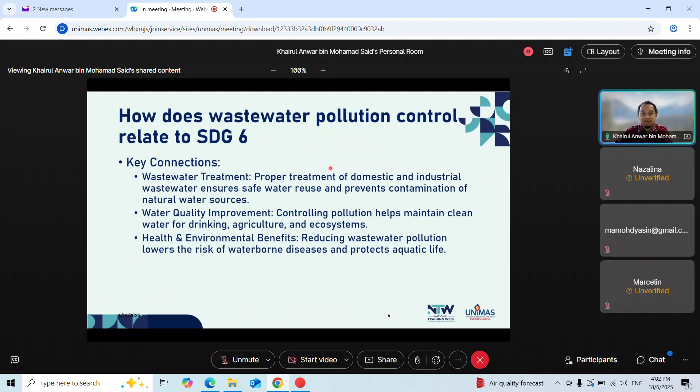SDG 6 focuses on ensuring clean water and sanitation for all. So how does wastewater pollution control relate to SDG 6? Proper treatment of domestic and industrial wastewater ensures safe water reuse, prevents contamination of natural water sources, improves water quality, and provides health and environmental benefits by reducing the risk of waterborne disease and protecting aquatic life. This is how water pollution control relates to SDG number 6.

So micro-credential, some of you might have heard the term though don't necessarily understand what it is. Micro-credential is a short competency-based recognition that demonstrates proficiency in a specific skill or subject area. This definition is from Times Magazine.

They are often earned through a series of courses and culminate in a digital badge from accredited institutions such as UNIMAS, signaling to employers that you possess focused knowledge.

Another thing is that by doing micro-credential, there are possibilities because we have APEL M now. We have APEL A, APEL C. So what is APEL?

For example, APEL A is using experience in order to enter a higher degree. APEL C is for credit transfer based on experience, and another one is APEL M. This one is the micro-credential, meaning if you possess a digital badge from an accredited institution, you can apply for credit transfer or exemption when you enroll in a higher degree.

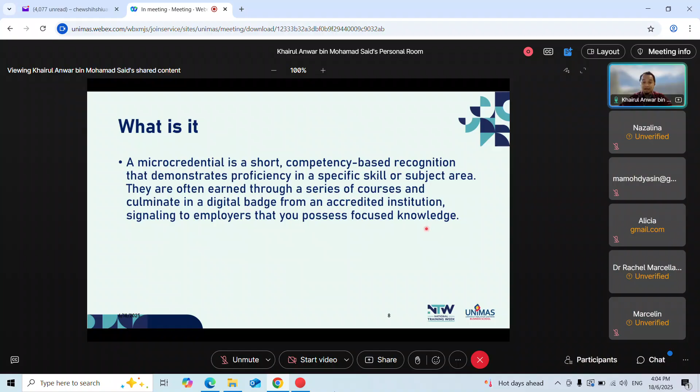For UNIMAS, this is how the badge looks like. Learners who successfully complete the micro-credential courses receive digital badges from UNIMAS. These badges can be shared on professional platforms such as LinkedIn, resume, and portfolio to highlight your skill.

The major goal of primary treatment is to remove from wastewater those pollutants that will either settle or float. The major goal of secondary treatment is to remove the soluble BOD5 that escapes the primary process. Tertiary treatment processes more - the process may involve chemical treatment and filtration of the wastewater. So the higher the treatment level, tertiary treatment, the more expensive, but the cleaner the water.

This is the degree of treatment: bar rack, grit chamber, equalization - basically this is the pre-treatment, then go for primary settling which starts the primary treatment, then secondary treatment, and tertiary treatment.

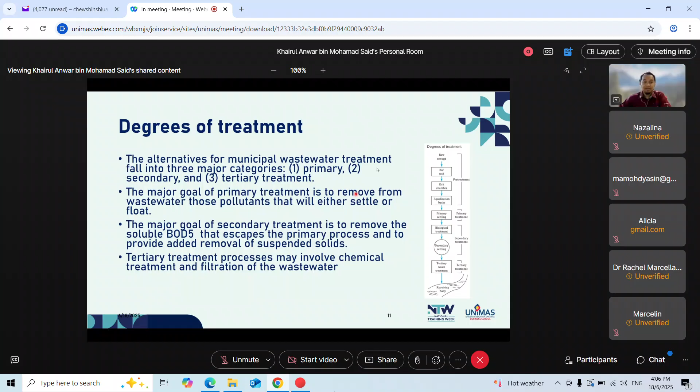I will not go into detail on each of the treatments because there are so many. Even the pre-treatment has at least three stages - bar rack, grit chamber, and equalization basin - before the primary treatment starts. Now, in this short period, I will just show you how the bar rack design is done using a solver program in Excel.

What is a bar rack? The bar rack looks like this - it's a screen. The first device encountered at the wastewater treatment plant is a bar rack. Any treatment, even water treatment (not just wastewater), has a bar rack to remove large objects that would damage the pump and valve after it, normally when it enters the primary treatment. The trash rack has large openings, 40 to 150 millimeters, designed to prevent large objects such as logs from entering the plant. We can say this is a mechanical separation.

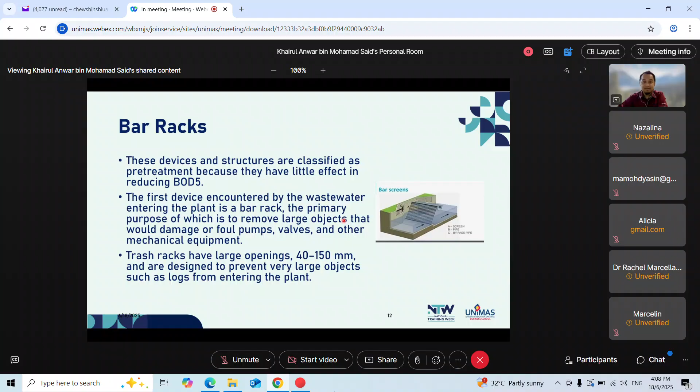The nomenclature of racks and screens: we have trash rack, bar rack, screen, fine screen, very fine screen, micro screen. Each of these types has a different opening size. The smaller it is, the better it can separate, but it will get damaged or clogged if you suddenly choose to use a micro screen at the first treatment stage. It depends on the raw water that enters the treatment system.

For trash rack, for example, the opening is 40 to 150 mm, typically used to prevent logs, stumps, and heavy debris. For bar rack, only 6 to 75 millimeters - this is to remove rag debris and large solids, which is normally used in wastewater treatment plants.

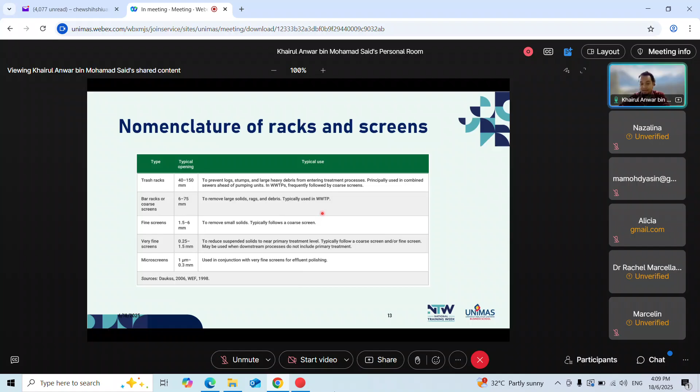So this is based on Metcalf and Eddy. So anyone who does design, this book is, I would say, a well-referenced book. Metcalf and Eddy is very detailed, although it's already years since it was published. Still, we refer to this book just to get the idea how to do the design.

This falls into four categories: chain-driven, reciprocating rake, catenary, and continuous belt design.

It can be operated using a sensor, or either you can use the hydraulic brake or the timer.

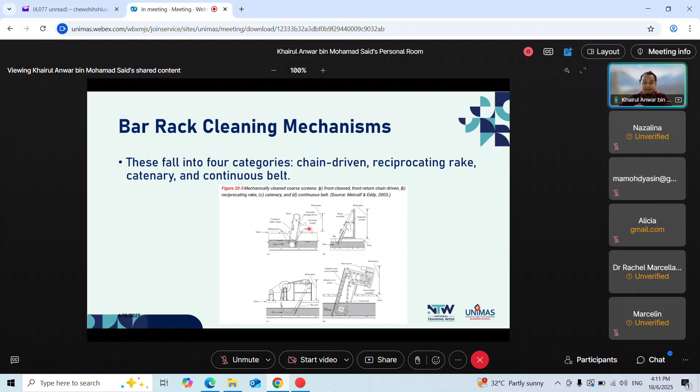Advantages and disadvantages of various types of screens. So for the chain-driven screen, for the front clean back return - in this picture it's a front clean front return - this is under chain-driven screen, the first one.

So for front clean back return, its cleaning element has a short clean cycle. Disadvantage is the unit has submerged moving parts that it requires channel dewatering for maintenance. Yes, for heavy-duty applications, disadvantage is less efficient screenings removal - carryover or residual screening to screened wastewater channel.

There are some other methods here - not methods, rather how it's operated.

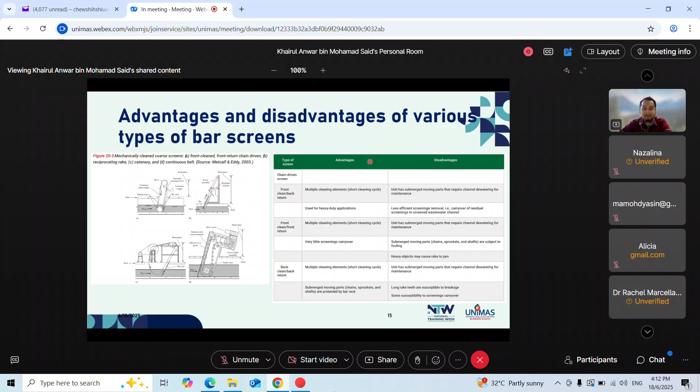So for the bar rack design practice: capacity and redundancy - two or more mechanically cleaned screens are provided so that one unit may be taken out of service without impairing performance. So the best design practice is to have two bar rack designs installed.

The location is mainly - the screen should be installed ahead of the grit chamber. That is a rule of thumb, or common sense - you remove the big physical items before you do the grit chamber.

Then the velocity should be at least 0.4 meter per second to minimize the deposition of solids in the channel. The velocity through the screen should be less than 0.9 meters at peak flow to minimize passing through the screen.

Because the screen is a rack, it's a line - horizontal or vertical line.

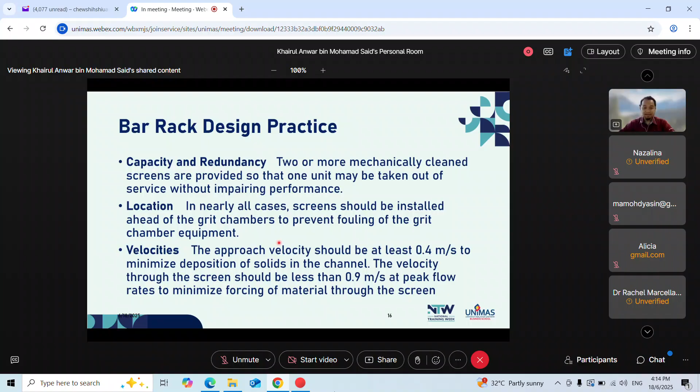So for the channel, dual channel must be provided. Typically they are constructed of concrete. This is how the two channels with bar rack look. They must be capable of being isolated by the use of slide gates or recesses - the channel wall for the insertion of stop logs.

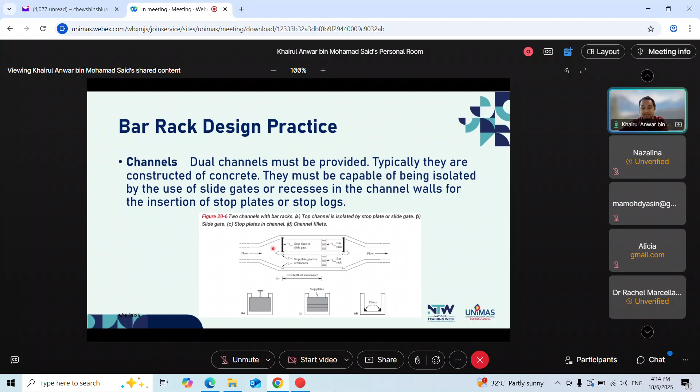The velocity of the open channel flow in the channel is described by many equations. We have two equations, V and Q. So V equals 1 over N, R to the power of 2/3, S to the power of 1/2. V is velocity, N is the coefficient of roughness, R is the hydraulic radius - in this case the cross-sectional area of flow over the wetted perimeter. S is the slope of the gradient line, and A is the cross-sectional area of the flow.

So how can we use this equation to do the design of the bar rack? Design the channel for the bar rack for Waterloo - Waterloo is an example in the book.

Approach velocity at average flow rate is 0.4 meter per second. Approach velocity at peak hour design capacity is less than 0.9 meter per second. Slope of channel is 0.0001 meter per meter. Width of channel is equal to the parshall flume inlet.

So the parshall flume inlet refers to the way this channel is designed. By using a parshall flume, you can actually determine the flow rate based on the height of the water outlet. You can read more about what the parshall flume is. So using a parshall flume means it doesn't have to install a flow meter - you can relate it by the height of the water.

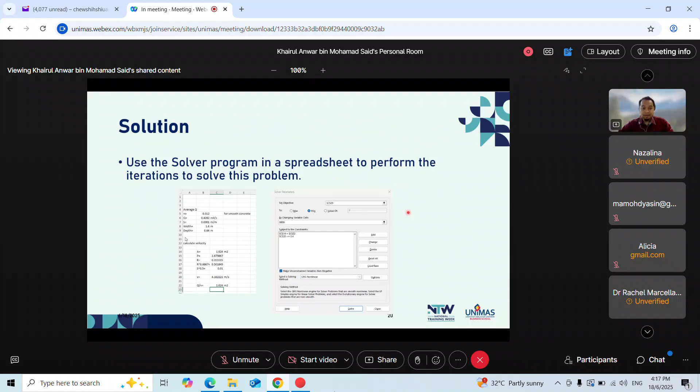So in this session today, I show you the solver program in the spreadsheet, which will assist the user to iterate and solve this problem. So this is the spreadsheet.

It's a simple spreadsheet, but using a solver program. In order to use a solver program here, this is the solver program. It's not a regular thing - you will not see solver in a normal or default Excel.

You need to enable it in options. Go to the add-ins, find solver, it's the last one here. Normally for my case, I already have it added in. So if you want to use it, you need to add it into the active application add-in. Select Excel add-in, click this, add-in available, click solver add-in, okay.

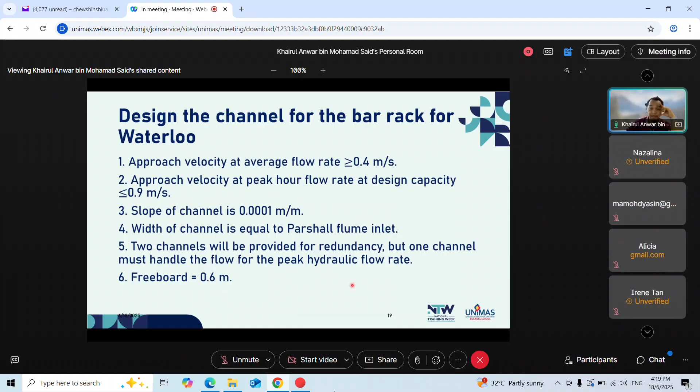So the solver will appear under the data tab at the end. So for this value, average Q, N is this is a Manning equation, the coefficient of roughness. The coefficient of roughness in this case is 0.012. Q is 0.4282. S is the slope, width, and depth of the channel. Then calculate the velocity.

Okay, we go one by one. Begin with the average design flow rate and set the fixed parameters as follows. So B5 is here, so N equals 0.012. B6, this is from the previous example, the Q is 0.4282. So B7 is here, 0.0001 is the slope, meter over meter. So the unit is correct, meter over meter, because that's how they calculate it, yeah, it's a slope.

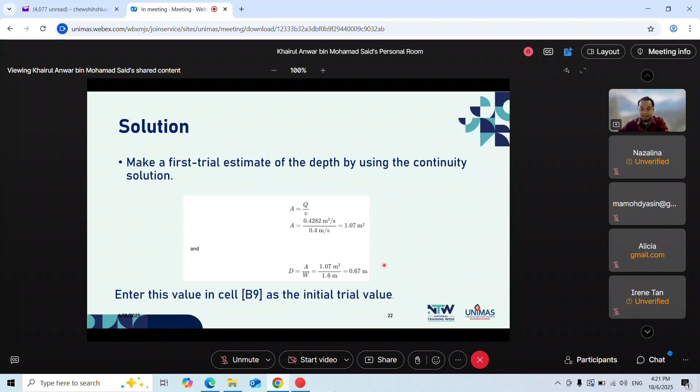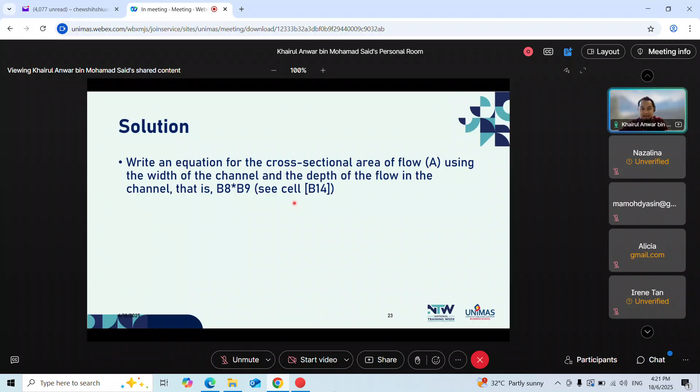For the depth D, because this is trial and error, write an equation for the cross-sectional area of flow using the width of the channel and the depth of flow in the channel, that is B8 times B9, so cell B14. So B14 is B9 multiplied by B8, which is true - width times depth, we get A.

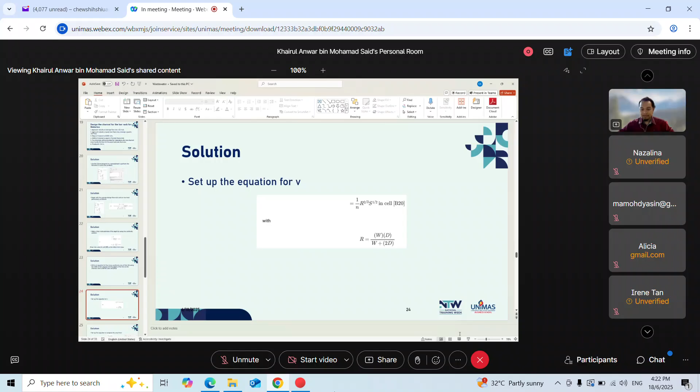So you need to write the formula, in this case 1 over B5 - remember it's 1 over N, so N is B5 cell. Then R is C16. Then S is - where is S? S is C18, yeah C18.

Okay, with R equal to W times D over W plus 2 times D. So in this case, R is this equation.

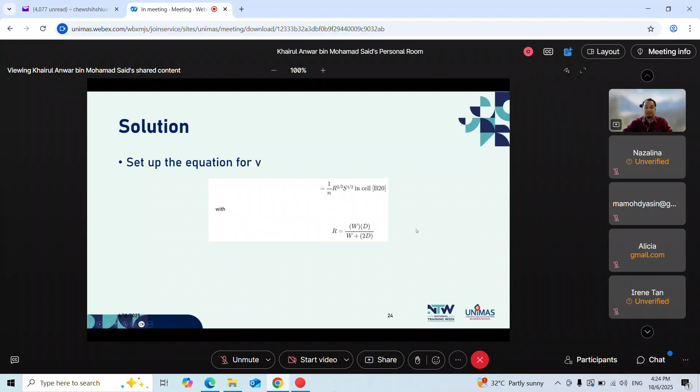The one set up the equation to compute the area from Q over v in cell B22.

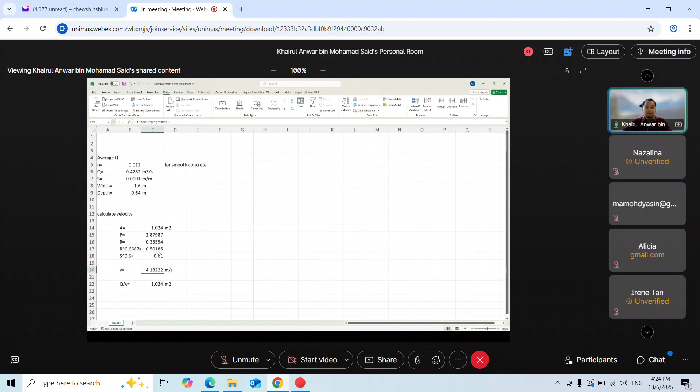Activate the dialog box for solver and designate the target cell B20, the one containing the computation of the velocity set equal to min. Once that's ready, click solver. So the target is B20, based on the main information. By changing variable cell, the cell that will be the manipulated variable is B9, the depth. The subject to constraint is when you select it.

So for the subject to constraint, you click add. It will ask you to select for the constraint. In this case, C14 must be equal to C22. And C20 here must be more than or equal to 0.4, so 0.4 is the minimum with the second here, equal to min.

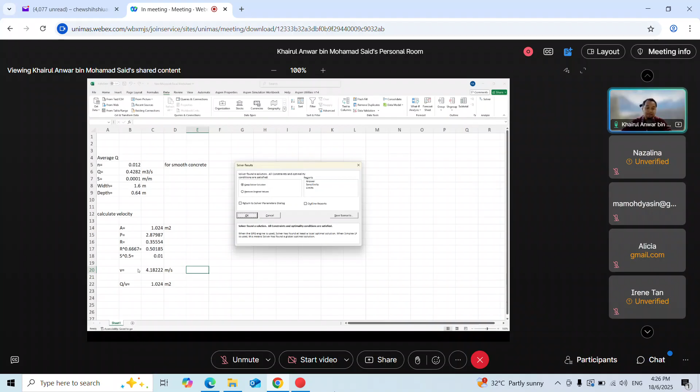So if everything is ready, you just click solve. Solver found a solution, constraints and optimality conditions are satisfied. So before you start, the value for V is not there - once we do the solver, it will appear. So this is the optimum, optimum design.

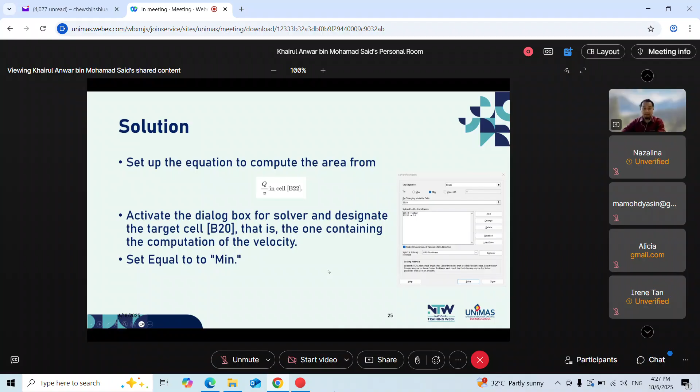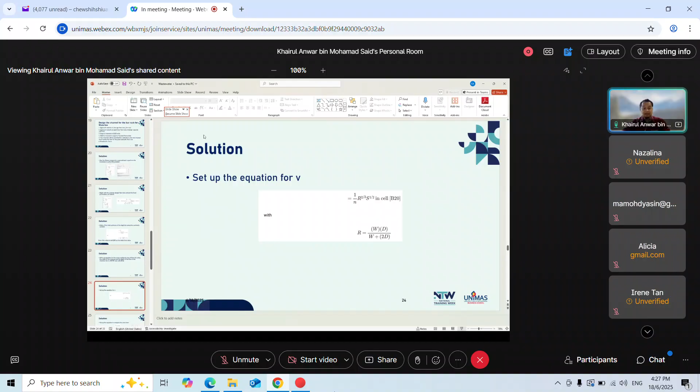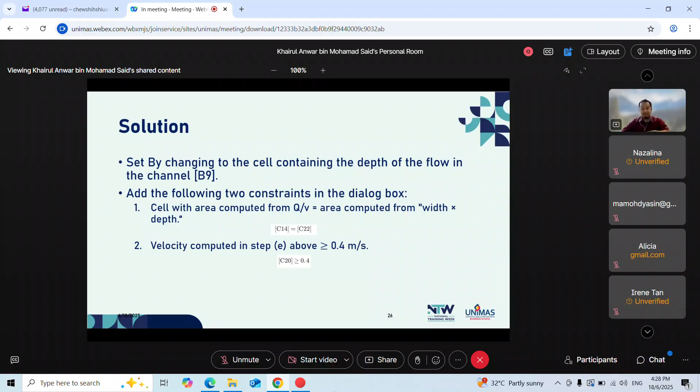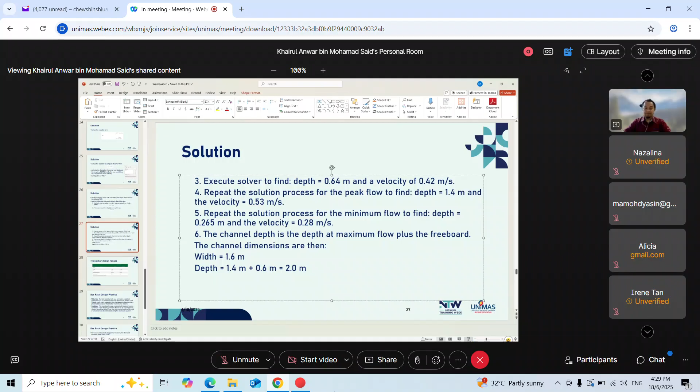The channel depth is the depth at maximum flow plus the freeboard. The channel dimensions are then 1.6 meter expansion plus... the channel dimension is width 1.6 meter, depth plus freeboard 2 meter.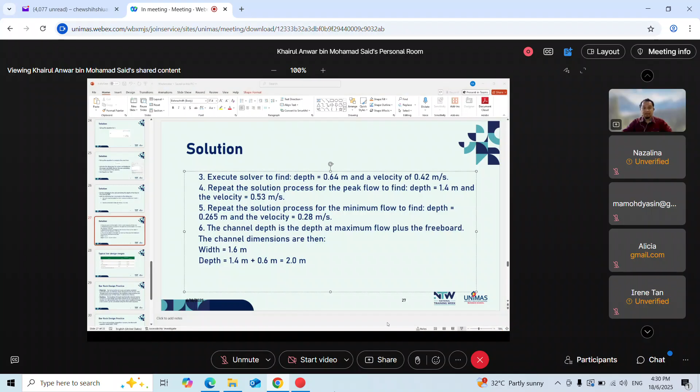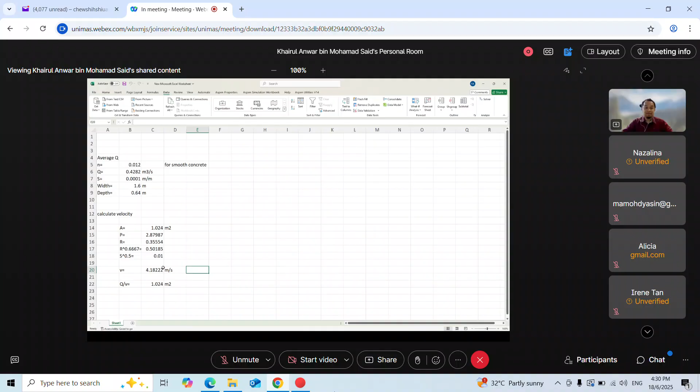It's very interesting, you change something here and it will calculate the velocity. It's easier to do the design, just put in the value and you can see how much it affects the main equation. For the n here, this is based on a booklet which gives an index for the smooth concrete.

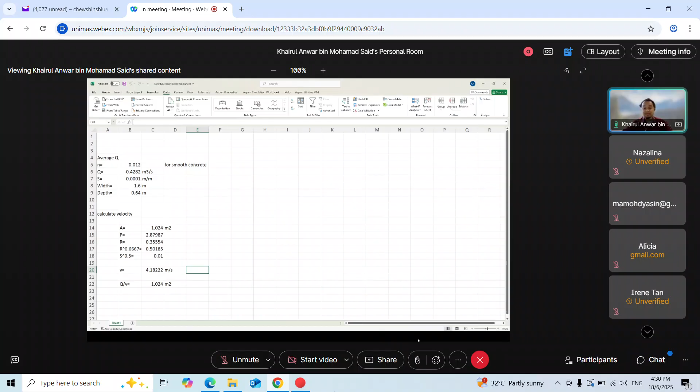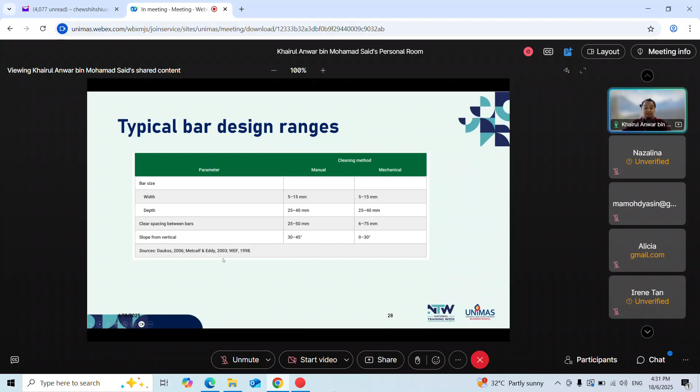It's still based on, we can find this information from the Metcalf and Eddy. It's there.

So for the bar rack design practice, for material, the practice is to use corrosion resistant materials, such as stainless steel and plastic for the bar rack. Though much more expensive, the stainless steel system is preferred because of their better maintenance history, but it depends on your feed.

So normally for plastic, we use it in the lab for the lab session so students can simulate it. For stainless steel, we use it if the feed is corrosive and at high temperature. There are also fiberglass and concrete to design or build the bar rack.

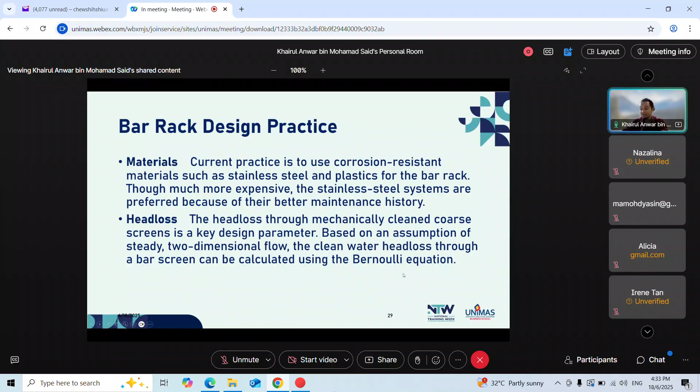The head loss through a mechanically clean bar screen is a key design parameter. Based on an assumption of steady two-dimensional flow, the clean water head loss through the bar screen can be derived using the Bernoulli equation. So for clean and partially clogged bar screens, the Bernoulli equation gives an equation such as this.

So HL is head loss, K is the empirical discharge coefficient, V through is the velocity through the bar screen, V approach is the approach velocity, and G is the gravitational acceleration.

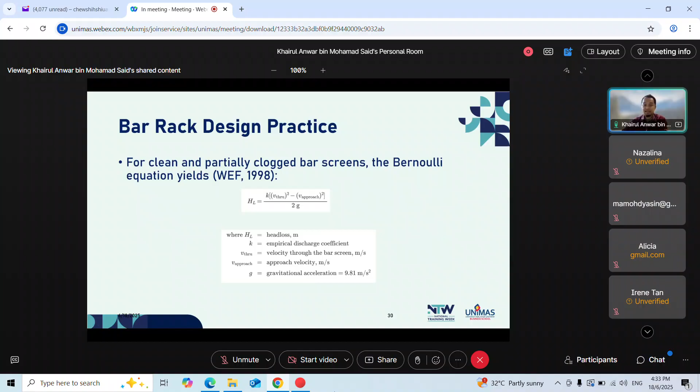The discharge coefficient is taken to be 1.43 for a clean screen and 1.67 for a partially clogged screen. The approach velocity is calculated for the channel upstream of the bar rack, and the velocity into the bar rack is based on the effective area of the screen openings.

It is estimated as the sum of the vertical projections of the screen openings. The approximate number of bars is the width of the channel minus bar spacing, divided by bar width plus bar spacing, giving the number of bars. The number of bar spaces is the number of bars plus 1.

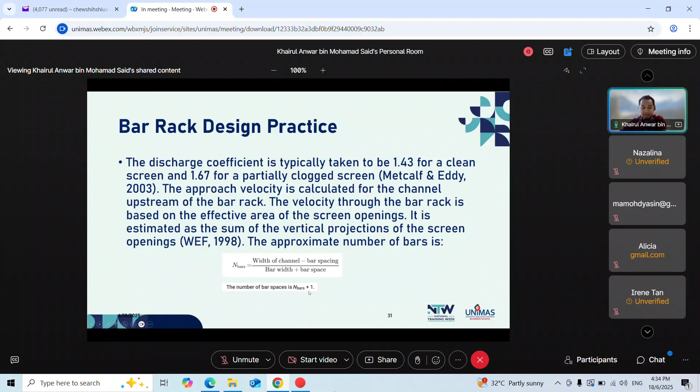Head loss through a mechanically cleaned bar rack is typically limited to 150 mm by operational control. The control activates the raking mechanism based on measurement of the differential head upstream and downstream of the screen. Alternatively, the raking mechanism may be operated by a time clock. So either a hydraulic head differential or a time clock is used to operate the bar rack.

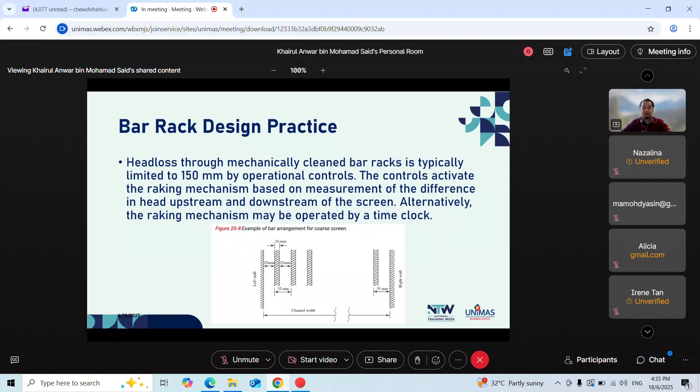Still got time. So there's an example of the head loss: estimate the head loss for a bar rack for Waterloo with a clean bar rack.

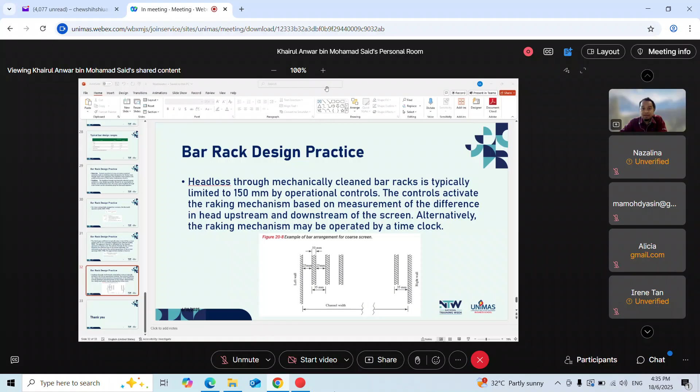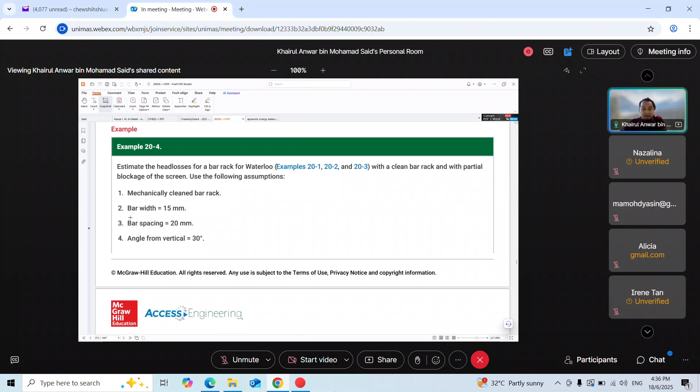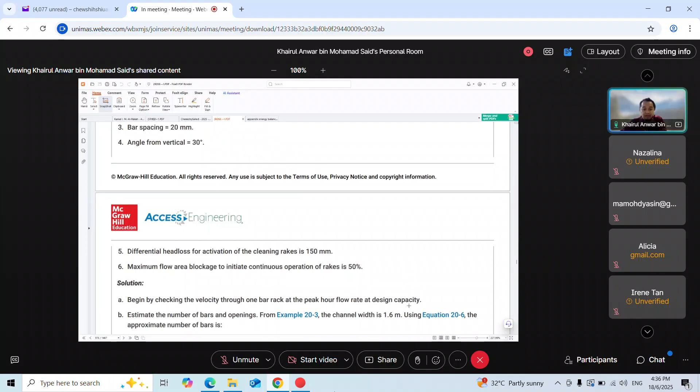Estimate the head loss for a bar rack for Waterloo with a clean bar rack and with a partially clogged screen. The assumption is a mechanically cleaned bar rack. Bar width is 15 mm, bar spacing 20 mm, angle from the vertical is 30 degrees. Differential head loss to initiate operation of the cleaning rakes is 150 mm, and the maximum flow area blockage to initiate continuous operation of the rakes is 50%.

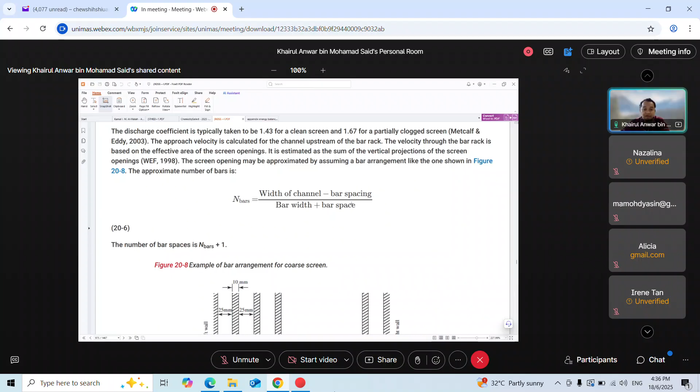By checking the velocity through a bar rack at peak hour flow rate at design capacity, estimate the number of bars and openings. To calculate the number of bars we use this equation, let's give it a name, using the equation: width of channel minus bar spacing, over bar width plus bar spacing.

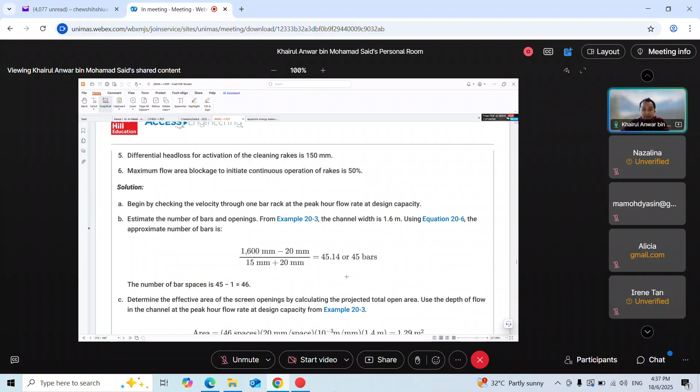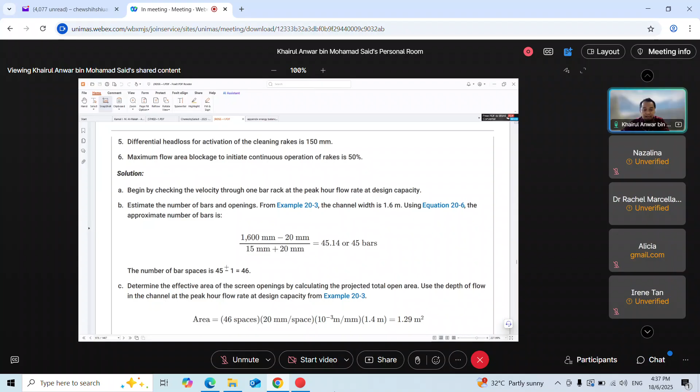In this case, 1600 millimeter minus 20 mm, over 15 mm plus 20 mm, so we get 45 bars. The number of spaces should be plus 1, so 45 plus 1 is 46.

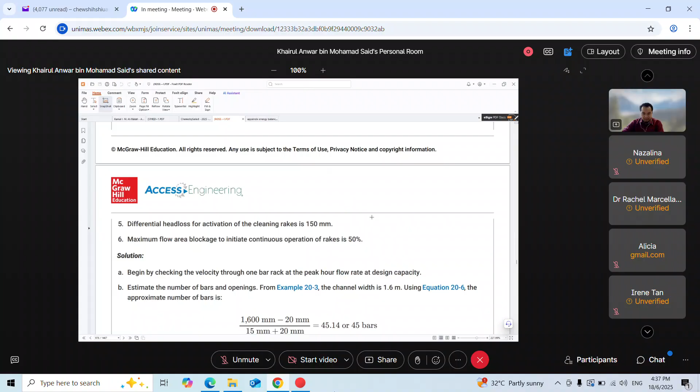Determine the effective area of the screen openings by calculating the total area. Use the depth of flow in the channel at the peak hour flow rate design capacity. Since we have 46 spaces with 20 mm per space, as given in the equation, with unit conversion, times 1.4, is the depth.

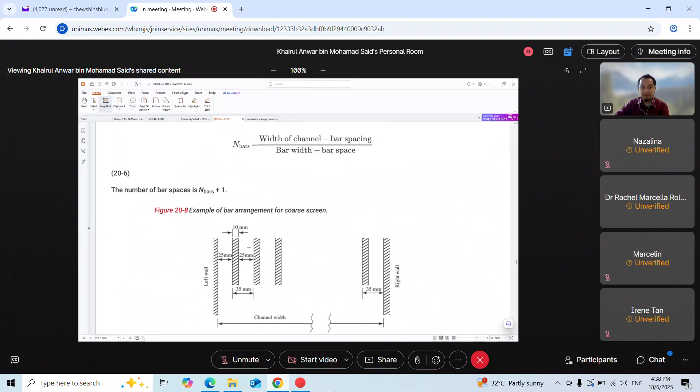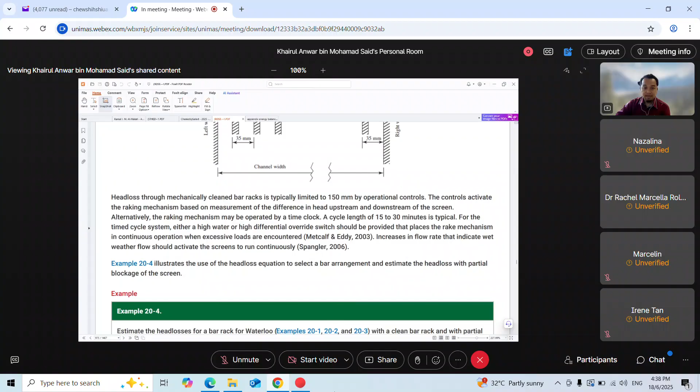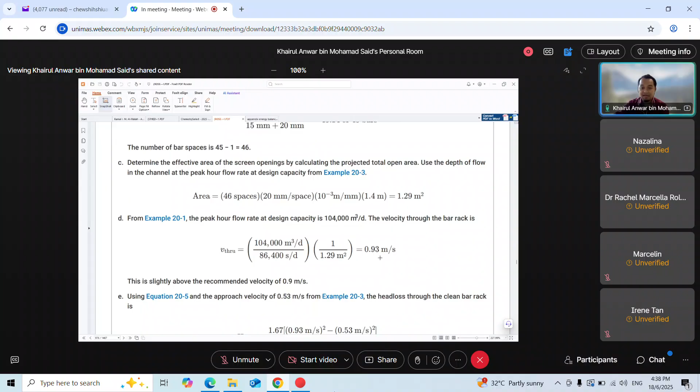So the V through is 0.93 meter per second, slightly above the recommended velocity. This is the velocity when water is crossing the rack, the bar. It should not be above 0.9 meter per second.

Using equation 20-5, approach velocity of 0.53 meter per second, head loss through the clean bar rack is using equation head loss HL, we get 50 millimeter head loss.

So if the bar rack is 50% clogged, the area of flow is reduced by 50%, and velocity through the bar rack is doubled to 1.86 meter per second. So the head loss is then 230 millimeter if the bar rack is clogged.

And if this head loss is greater than that set for initial cleaning, the velocity constraint is exceeded. Now check the velocity and head loss at the average flow rate at design capacity of 37,000 meter cube per day. The depth is 0.64 meter and the approach velocity is 0.42 meter per second.

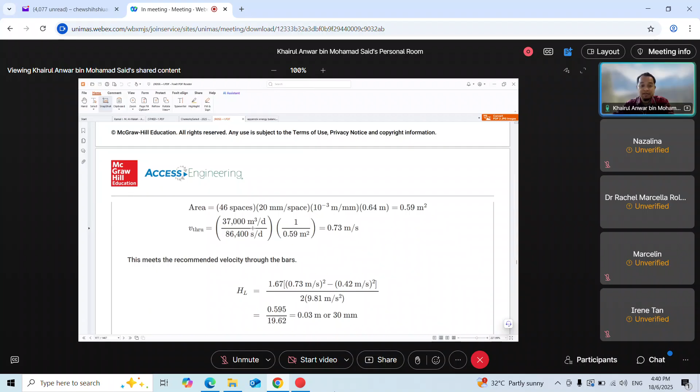So for the area here, we have 46 spaces, 20 millimeter per space, and 0.64 depth. So the area we have 0.59 meter square. So the V through in this case is 0.73 meter per second, within the recommended velocity through the bar, with head loss around 30 millimeter.

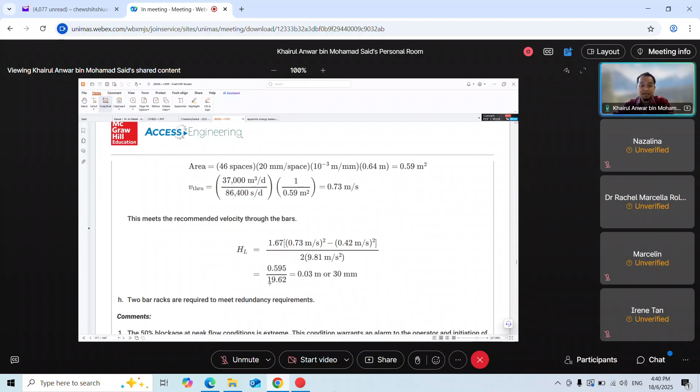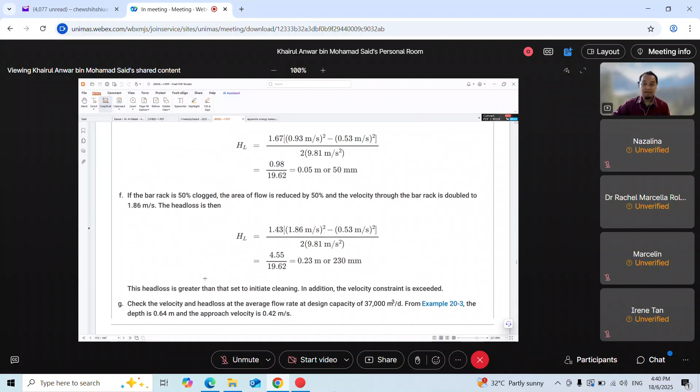All right. Okay, that's all from me. Yeah, finished early.

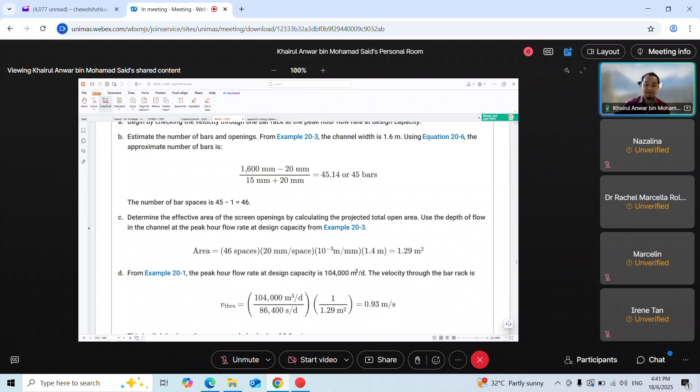There are many things that we can design. This is one set of it, maybe. Yeah, there's a lot of things.

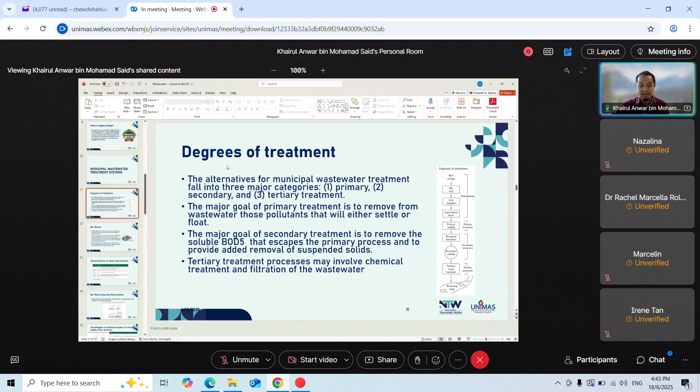Not many use a solver, but in our faculty, yes, the students learn about Excel here, how to use it to do their assignments. For example, assignment, then they need to create, develop an Excel spreadsheet that uses the solver function to calculate the heat.